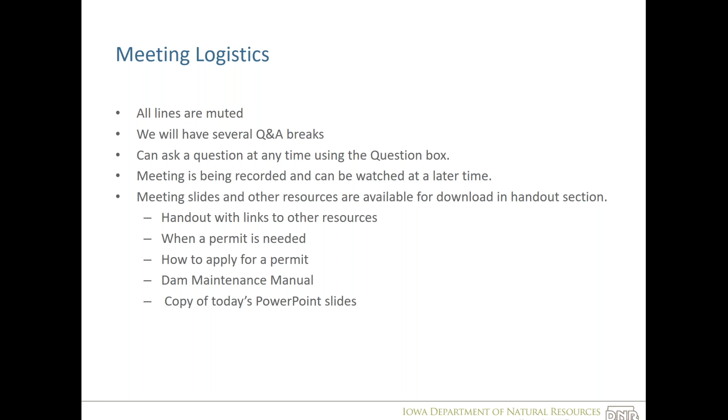This is our second in our 4 webinar series for the month of May. Today we'll be talking about how dams fail and proper dam maintenance. Last week was our 101, and that's recorded and available. Next week we'll be talking about finding and hiring engineers. Then our last week we'll be talking very technical, oriented on engineering design and what's needed for permitting, and potential changes to our dam safety rules coming up.

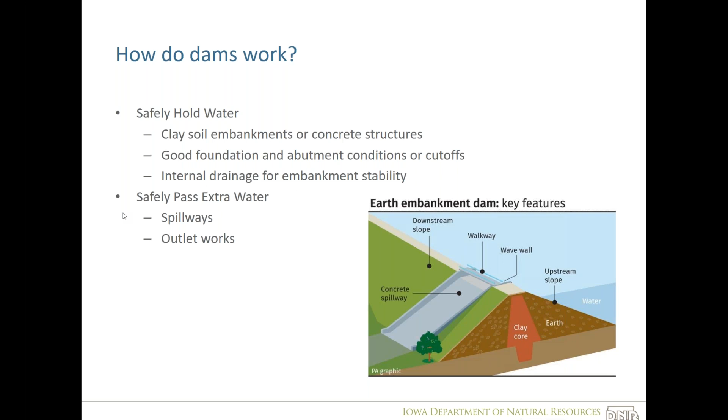So for a recap of our Dams 101, as we talked about last week, the two basic things that dams have to do are safely hold water and safely pass extra water without compromising, usually overtopping. We'll talk more about these, but obviously what causes failures is when one of these two things doesn't work well.

Last week we went over parts of a dam, which will come into play a little bit today when we talk about failure mechanisms. As you recall, we have our reservoir upstream of the dam, our principal spillway, inlet riser, upstream slope, crest of the dam is the top. The groin is kind of where the dam meets the abutment.

Outlet works is where our water comes out. A lot of our dams have internal drains and filters, and those drains will have outfalls, separate pipes usually that can drain those internal filters. And then most dams have an auxiliary or emergency spillway to carry extreme flows.

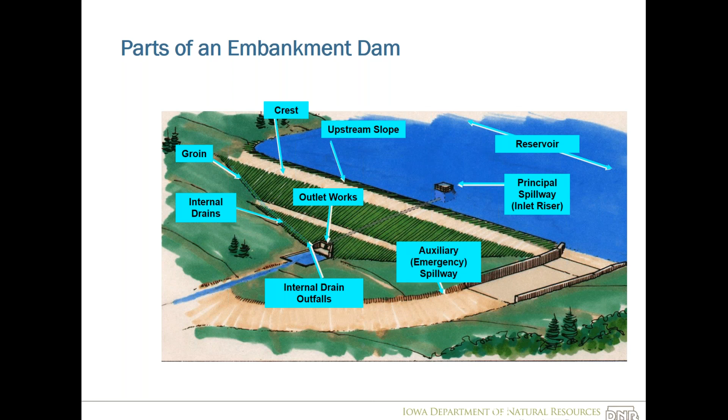Looking at the inside of a dam, this drawing shows a cross section. As we mentioned, embankment dams are typically made up of a clay core that's as water impenetrable as we can make it. And then if we don't have enough good clays, we zone dams using our best materials in the middle, and then upstream and downstream materials to help support that clay core.

Most of the time in Iowa, we do have enough clay available nearby that we build a homogeneous dam. We build one clay dam with a topsoil cover. And then, a lot of our larger or higher hazard dams, we include filters, which help intercept any kind of seepage through the dam and safely drain that out.

It's a tricky switch. So how do dams fail?

Probably one of the most common ways that we see dams failing is that they overtop. Earth embankment dams are really good at holding water, but if we get erosion down the back side of a dam, that steep back slope really lends itself to fast velocities if we get water flowing down it, and that can erode the materials, which takes the support away from the dam.

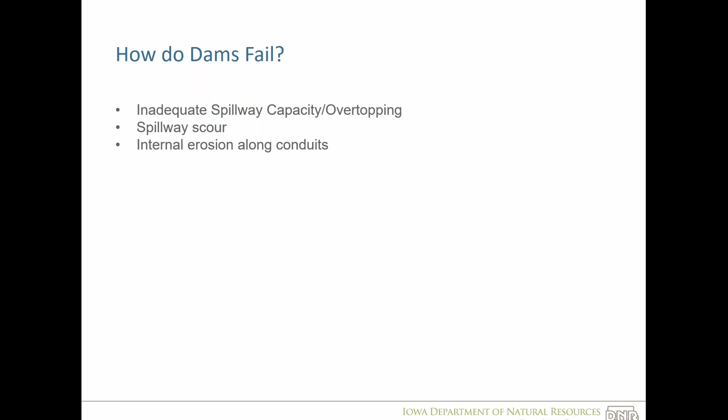Spillway scour can also be an issue. And then another very common way is internal erosion along conduits, piping from rodent burrows, or actual structural failure - if a pipe collapses or a chute or something, concrete or metal just gives way.

Contributing to some of those dam failure causes can be uprooting of trees or vegetation, long-term erosion doing damage to the dam itself. And same thing on the upstream side, if we have continued wave erosion that's eroding the upstream face.

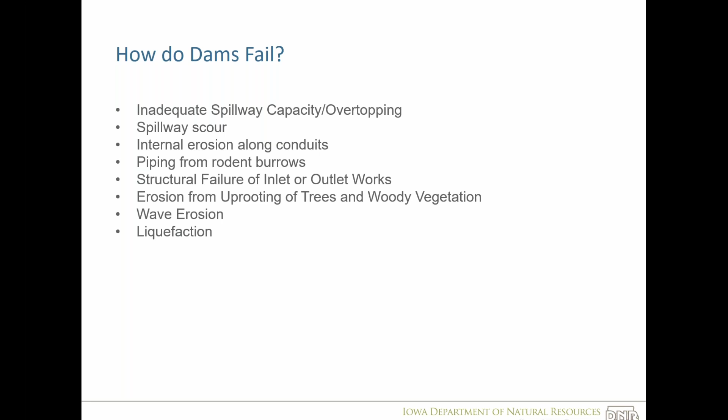This is really a rare risk factor in Iowa, but liquefaction is often caused by earthquakes, which basically, once the ground shakes, soils can become liquid and collapse.

So why do we care about dam failures? Obviously, dam failures can cause loss of life, downstream property damages, environmental impacts. You lose the reservoir itself, and of course, you have costs associated with replacing the dam and everything downstream that was damaged.

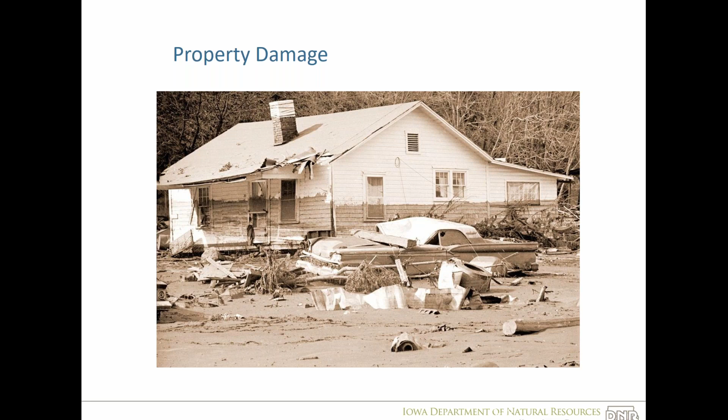A few photos of some historic failures. Obviously, floods in general cause significant impacts, and dam failures cause these extreme floods. And then, of course, even if you don't have downstream failures, you're losing your reservoir, which is the whole point of your dam.

One of the most common causes of failure of a dam is just overtopping. This can be caused by either a clogged spillway, meaning that we can't get the water out the way it's supposed to, or even if the spillways are operating at full capacity, it just might not be enough for that rainfall event. Our low hazard dams around the state, about 90% of our dams, were really only designed for about a 50-year flood. So when we get 100-year floods or some of our more extreme flood events around the state, those dams frequently will overtop, and that'll cause erosion of the backside, and sometimes they breach.

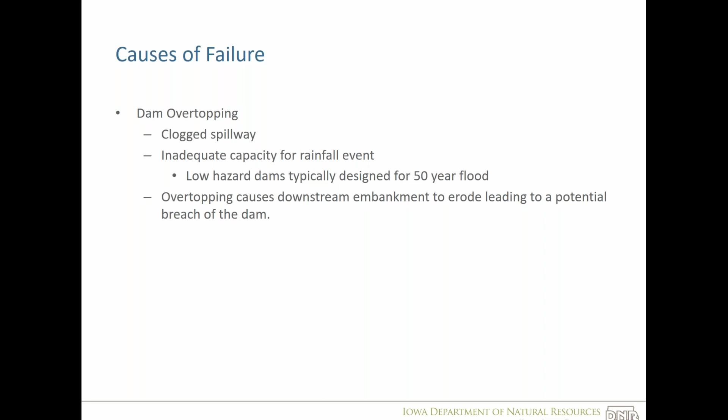As we talked about, that can erode the embankment away if we have enough flow. Just some pictures of that going on. Really, once you get head cut started, that's when things can rapidly progress through.

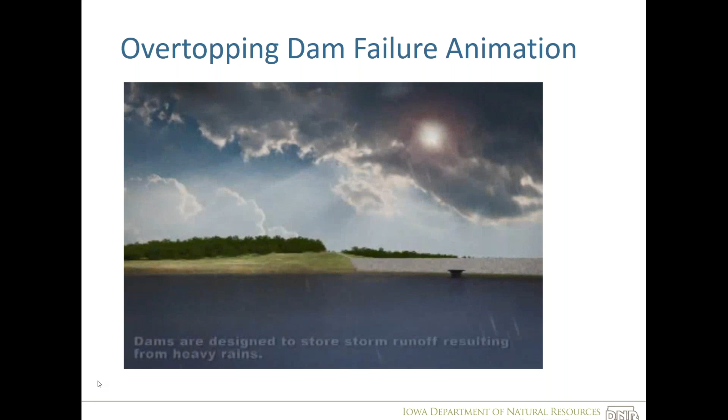This basically reiterates the obvious: when a dam receives a lot of rainfall upstream, that reservoir is going to fill up. Like we talked about last time, that's kind of by design - we do design dams to store that extra water, but sometimes we don't have enough storage or spillway capacity, even when we use our auxiliary spillway, which is happening here. So the dam keeps filling up, we get overtopping, and you can see in the middle there we got a major head cut started. Once you get that opening between the downstream and upstream reservoir, it progresses quite quickly.

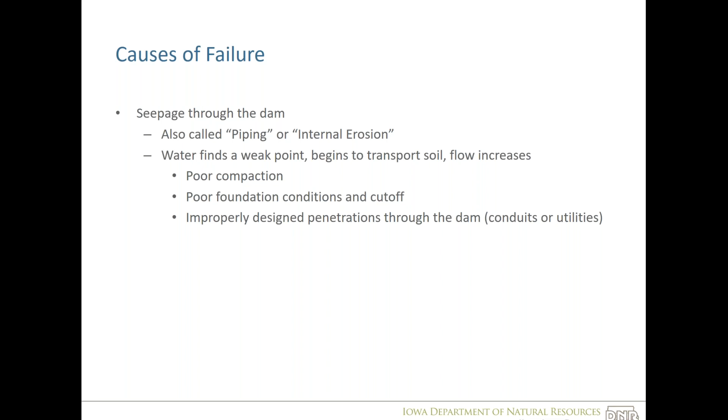I went ahead and put some graphics in here since I'm not sure how well the animations play through. This demonstrates what we've been talking about: seepage can find a path and start out as a very small trickle. A lot of dams do have seepage that is contained, but anytime you see seepage with any kind of materials, muddy water, or cloudy water coming out, that means material is being transported. As that material is transported, the pipe can get larger, transporting more material, leading to sinkholes upstream and, of course, large voids showing up.

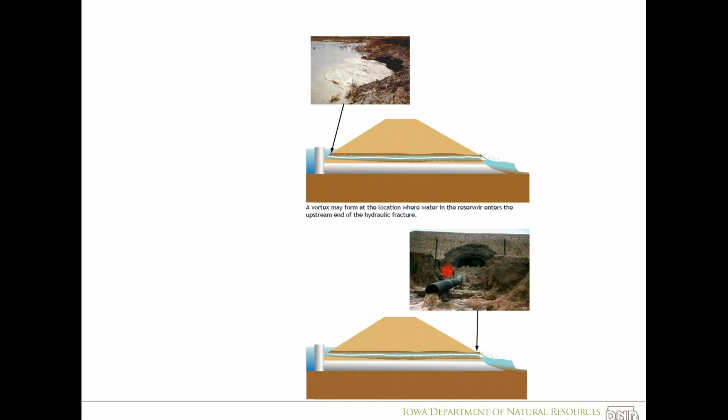This one obviously is after the fact, when it's mostly drained.

Similarly, that showed seepage above a pipe. One of our largest concerns, and something we pay special attention to in dam construction designs, is the treatment anytime we put round conduits in a dam - it can be difficult to compact under that pipe, which is a weak area by nature. We have different design methods to help deal with that, depending on the size of the dam and hazard class, but that can be a weak area where we get piping and internal erosion going.

So here's an example of that. This started with water coming out of a deteriorated pipe, but it shows that water flowing along a pipe can pretty quickly carry that soil away. We'll try to play this animation.

So for those dam owners on the call, seepage is pretty common, and that's one thing you don't want to take for granted. You always want to keep an eye on it, note any changes, and see if improvements can be made to better filter that, rather than just letting it be.

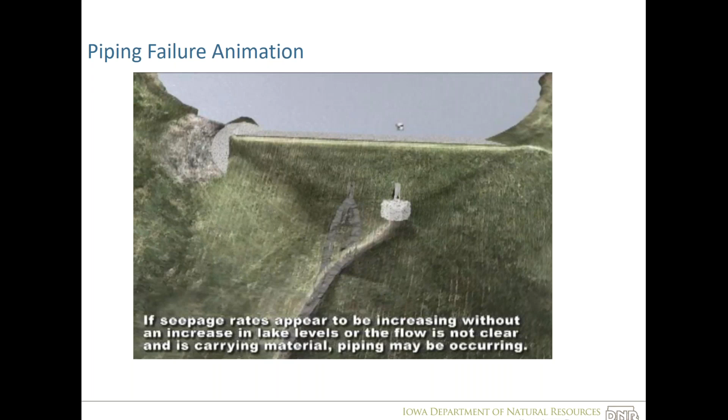So here it just shows the animation of that tunnel. Basically, the more water we get going, the more material erodes, and it has an exponential growth in how quickly that can grow and create a full tunnel through the dam, which could then cause a collapse and major loss of a large portion of the embankment.

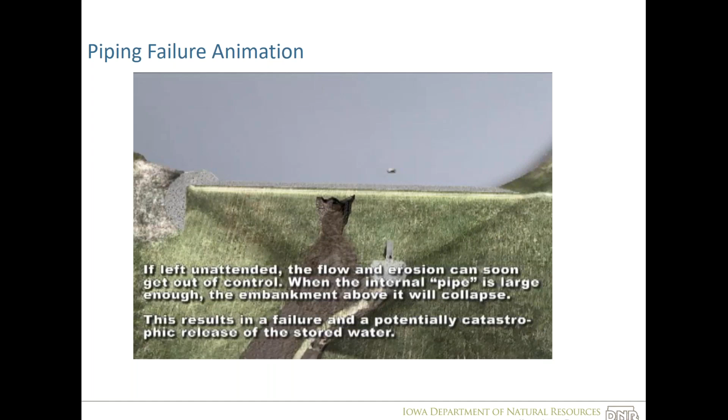So another cause is embankment slides. This is when the embankment itself becomes unstable, usually when the dam is saturated. As soils get more water in an embankment, the weaker it becomes, and that can happen from seepage into the embankment, or sometimes we get surface slides.

We get surface slides on the downstream slope just because we've had a ton of rainfall leading up to that event. So sometimes we can even just get rainfall infiltrating on the backside and causing some minor slides as well.

One of the things we try to point out is when large trees are allowed to continue to grow on dams, as they get older, they blow over. You can lose a significant amount of material when they do that, weakening the embankment.

A little sketch of a typical embankment slide here. Typically, you'll know it's a significant slide if you see this scarp up top. You'll usually see a vertical or near-vertical opening, and then usually a bump out below it that indicates you have a major slide.

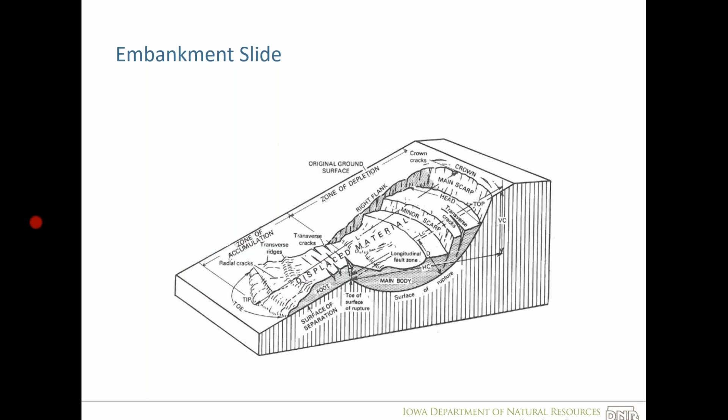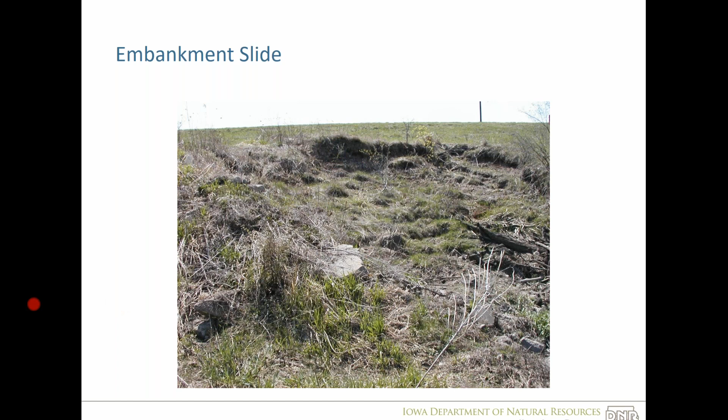Kind of the other main cause of failure of dams is structural failure. Spillways themselves can deteriorate. We can have pipes that rust through, concrete cracking and deterioration, and we can lose walls or floors. And then another common one is when we have concrete spillway chutes, we can get water starting to go underneath the chute.

That water going underneath the chute can erode the materials beneath that concrete chute, and that's particularly dangerous because we can't see it happening. A lot of times you can get significant voids underneath our concrete chutes before they're ever discovered.

And then of course, when we have concrete dams, any kind of instability of the concrete itself - cracking or mass movement - can occur.

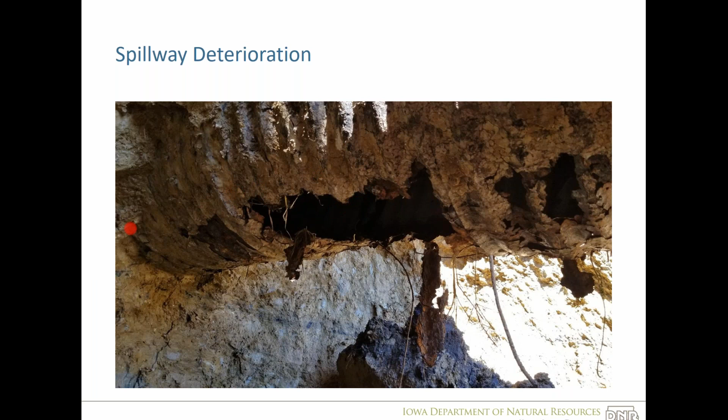Here's an example of that spillway pipe just hitting its max age and has rusted through. Corrugated metal pipes definitely have a limited age of 35 to 50 years and will need to be replaced.

All right, so about a half an hour in - this is kind of our first break. We're going to go on to some specific case studies of dam failures, but wasn't sure if there were any specific questions on some of the dam failure mechanisms.

I don't see that we've gotten any questions. Okay, so if you think of something, go ahead and type that in at any time, and even if it's on what we've talked about before, go ahead and type that in and we'll talk about it in a future break.

So our first case study I want to talk about is Lake Delhi. I'm sure a lot of you have heard of this lake up in northeast Iowa. This one is especially relevant - I started at the DNR in the dam safety program about six months before this one failed, so it was certainly a learning experience for my part and Casey's part as well. I think Casey hadn't quite started yet when it failed, but he did shortly after, so we've watched this one closely.

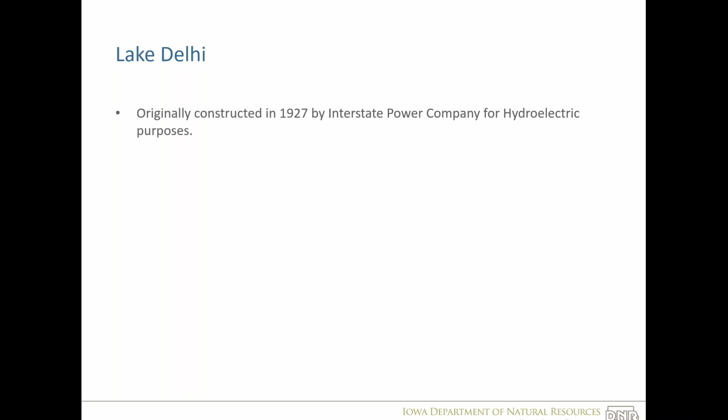It's an older dam, built in 1927. It was a hydroelectric dam. It held 3,790 acre-feet of water, and if it filled to the top, we had about almost 10,000 acre-feet. It was 58 feet high from the downstream toe.

It created a very large and long impoundment, basically damming up the Maquoketa River. So we had a 9-mile long impoundment upstream of the dam. It wasn't very wide per se, but a lot of homes and development had happened over the years that used that impoundment.

In 1973, they no longer maintained the hydroelectric generation—it wasn't profitable anymore. And it was turned over to the Lake Delhi Recreation Association, made up of the homes that surrounded the lake.

It did have inspections every 5 years, both by the DNR, and they were required to hire a professional engineering company to do an independent full investigation as well.

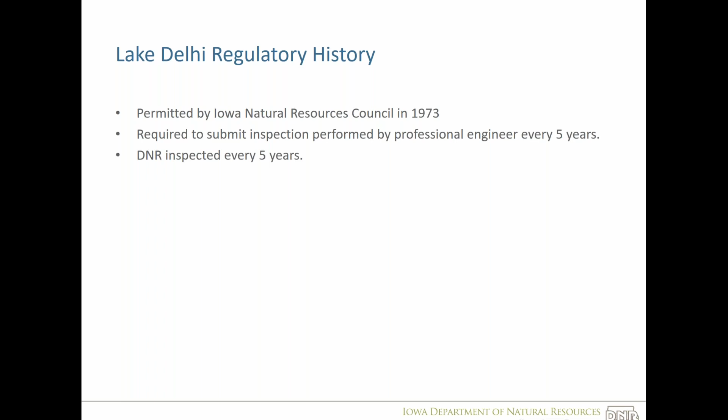Our last inspection report on it had noted some things. There was some upstream erosion. The gates were all in pretty bad deterioration—one of them was especially bad—but they were at the time working on repairs. They did have new gates ready to put in, and they were getting ready to do a lot of work on the dam.

But they did have a lot of trees and brush that we'll look at in a minute here too, on the downstream side. So here you can look at a picture of the gates, the old powerhouse where the hydro was, and this earthen embankment that had a huge amount of trees and brush.

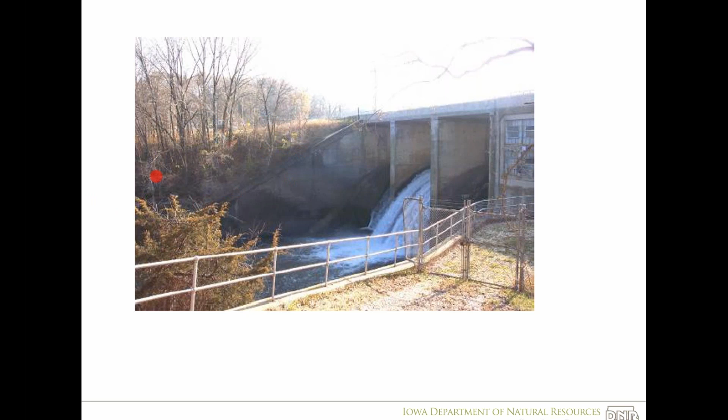Another picture—there was a road over the dam originally. Once again, you can see it's really pretty heavily wooded, so it's hard to inspect and see if there's anything going on, which we'll talk about in a bit.

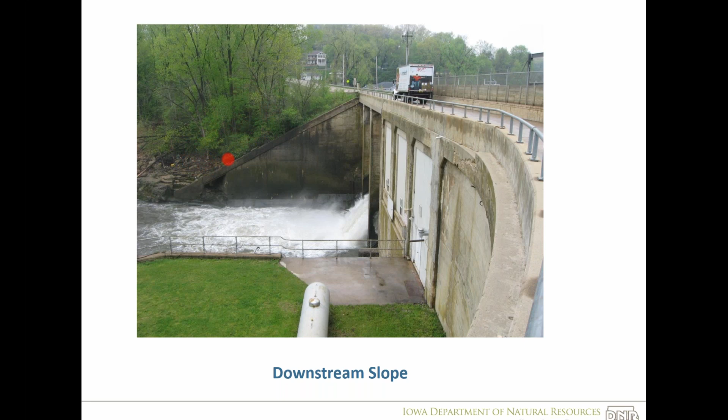Like we said, they had some issues with the concrete and the gates. This is leakage around the gate, more leakage. This is after the failure, but you can see some of the historic damage to the concrete here. Like I said, they were planning to do repairs, but hadn't gotten to it yet.

So in 2010, we had really record rainfalls upstream of the dam. Starting Thursday night the 23rd, they could pass low flows through the old hydro gates, but as they got larger rainfall events, they would slowly open up these 3 gates. So that's what they were doing.

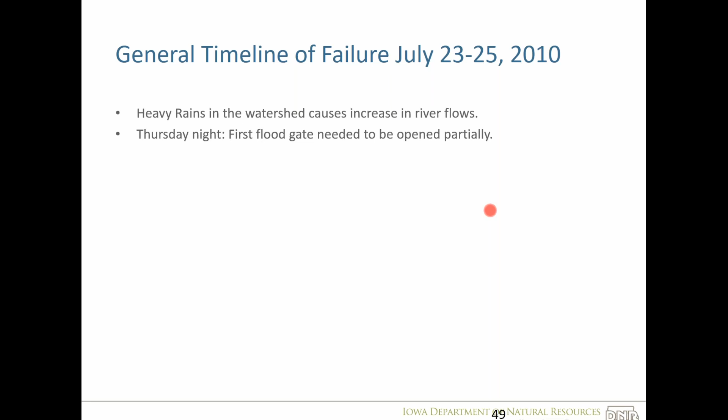So they opened them all up, but one of them kind of sticks, and so one could only be opened up to about 6 feet compared to, I think, 15 or 16 feet they should have been able to open up.

So they were already kind of in flood fighting mode when they got a weather service forecast that said, hey, we're going to get between 11 and 14 inches over the next 2 days. So they knew some tough times were coming.

They were keeping a close eye on the dam. At 3 a.m. Saturday, they noticed a whirlpool and some roadway settlement on the south end of the dam, which is that earth embankment.

At 5:30, as the sun started coming up, they noticed a significant sinkhole on the upstream slope, which is indicative, as we talked about before, of some kind of piping going on inside the dam if we're seeing a sinkhole that large.

And then, as it got more light, they could see that there was water coming out downstream of that embankment.

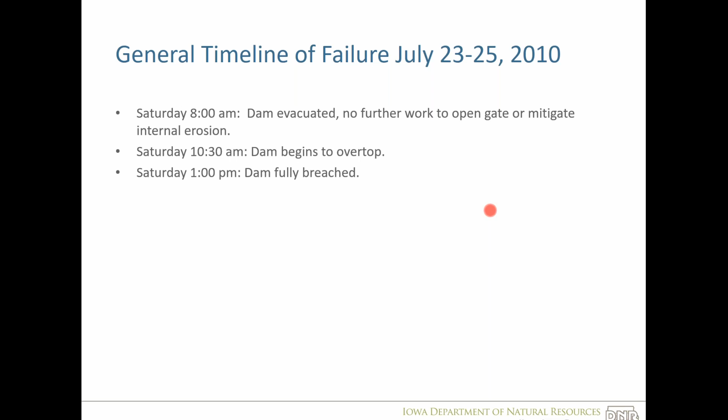Because of those significant observations, they basically got everybody off the dam. It wasn't safe to try to mitigate anything at that point. Water level during this time continued to rise as they kept getting that peak flow coming in. At 10:30 a.m. the dam actually started to overtop, and by Saturday afternoon the dam was fully breached and emptying.

This is a kind of cross section of the river. We're to the left here at the downstream, and we're looking at the river profile as we go upstream, up to Manchester. The lines at the top are the different flood levels that occurred on the Maquoketa River.

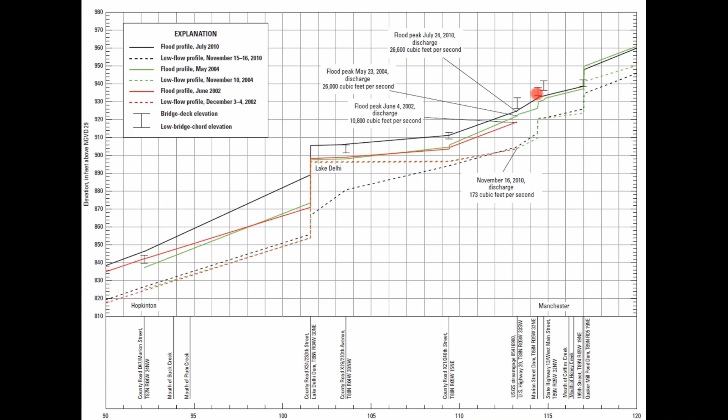In 2010, this black line at the top was the new profile that was measured. A little zoom in on this was the traditional lake. Really, the lake in previous past floods hadn't seen a significant rise. It didn't - the spillway was able to keep up, really didn't have a significant flood or increased flood depth on the dam for those previous flood events.

Pretty minor, versus 2010 when we had significant additional height on the dam. So, kind of a new test situation. Obviously that caused flooding even without the dam impacts.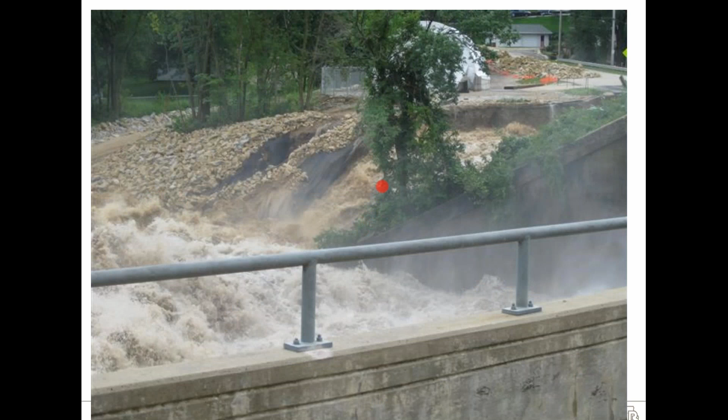This is looking downstream where previously we saw all those trees and brush. There's what looks like a boat going over - I think that might have been the barge they were using to work on the dam, starting to go over.

Yeah, it's that work barge. And then the road, the dam's embankment is completely gone. This was what was left - the guardrail held up quite well though.

Some of the after pictures - what's kind of amazing is just some of these boats that got pulled through the gates or even trapped on the gate piers here and twisted.

One thing to note that we'll talk about in a minute is the earthen part of the dam did have this rock or concrete wall to help stabilize the dam. We can see parts of that concrete wall that was supposed to hold the water here that eventually broke away - here you can see the other part of it. And it had a sheet pile cutoff along the foundation.

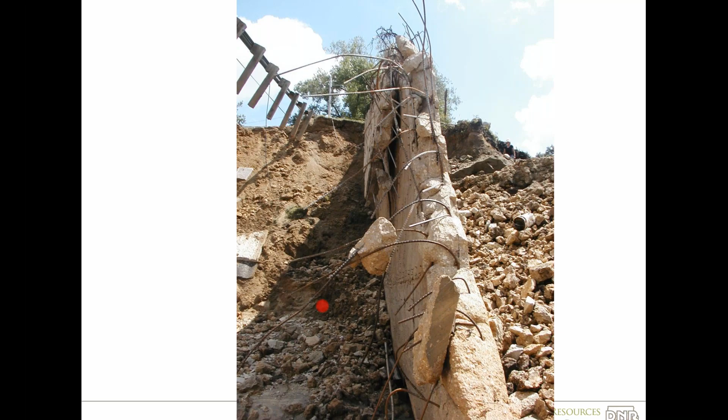A close-up of that reinforced concrete wall. And then left with an empty impoundment.

One thing interesting about Lake Delhi Dam is nationally it got a lot of interest, and there was a push that said, hey, when dams fail, we really need to do a better job of investigating them, to put together reports so we can learn from them and see what happens. So that happened in Iowa in 2010 for Lake Delhi. We were able to put together a dam failure investigation.

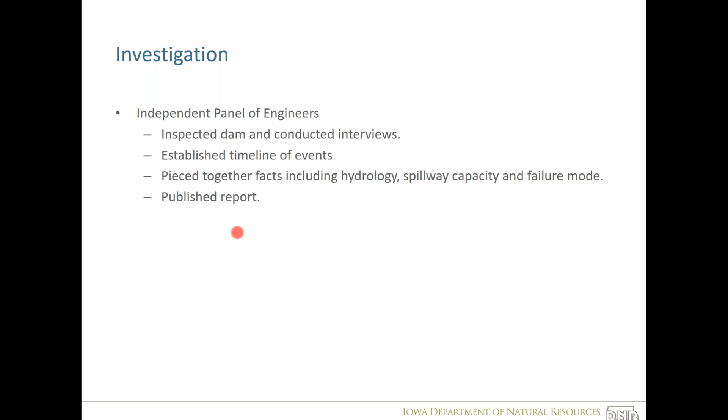FEMA helped out. The National Dam Safety Program, National Dam Safety Review Board, helped put together a team of 3 federal dam experts - one from the Bureau of Reclamation, one from the Federal Energy Regulatory Commission, and one from the Army Corps of Engineers. They came and inspected the dam and interviewed everybody that had anything to do with the dam over its history, and they put together a report.

That was really useful to have a true forensic study of exactly what happened and what led to the dam failure, and some other what-ifs that had happened - what if they had opened the gates, or different scenarios. A lot of people start putting opinions out when things like this happen, so it was nice to have a report that was able to look at all those theories in detail.

But really, the key player in this was this concrete wall in the earth embankment. You can see here on the upstream end of the embankment. One of the couple flaws with it was that it was 6 feet below the top of dam.

So when we had that new record level in the impoundment, we basically had a water level that was above that concrete wall. We also likely didn't have very good compaction up against the wall behind it. So once we got water above the wall, seepage was likely rapidly occurring.

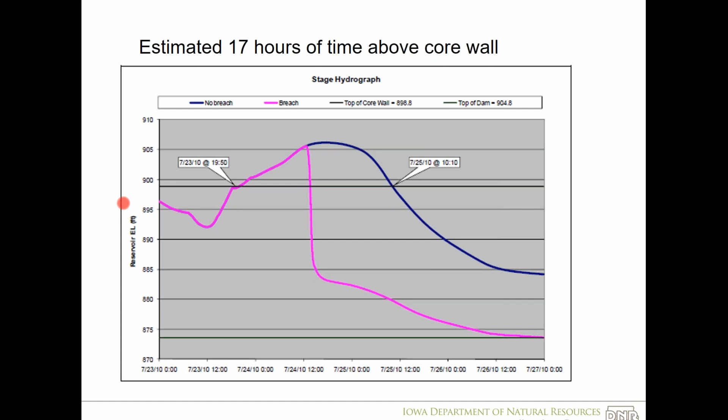This is some of the forensics they did, and it was determined that even if the dam hadn't failed, there would have been a significant amount of time of flow over the top of the wall - about 17 hours. We can see that once the water level got high, we started seeing whirlpools and exit discharge. Water was pretty much flowing right through the dam even before it overtopped.

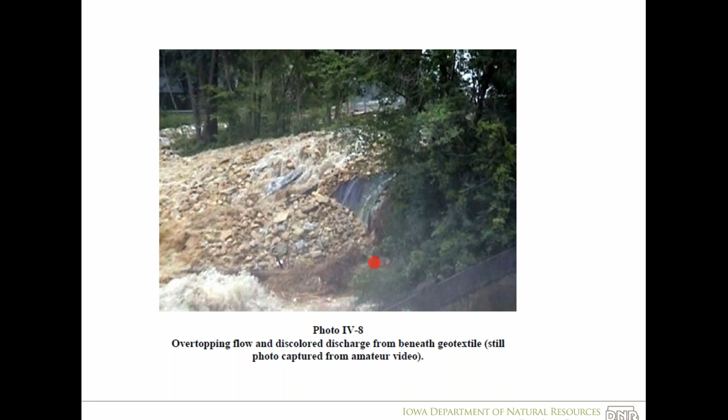Some of these pictures show that real cloudy discharge even before we had overtopping - here and here.

So, like I hinted at, the cause was basically that internal erosion, or what we called piping. Once the water level got above that wall, there really wasn't anything to prevent it. It was real sandy soils, and that's why they put the wall there, but since it didn't go to the top of the dam, it was kind of an inherent weakness that was finally exploited when we had that record flood.

This was kind of the first national forum dam failure investigation. It really spearheaded some committees on the national level, developing guidelines on how best to do these.

Some takeaways for owners: anytime your dam is seeing new record levels, be very alert - you're now fully testing your dam where maybe it hasn't been before. The trees and brush on the dam - they might have seen some problems a little earlier had they been able to see down the back slope of the dam.

And then a big takeaway is, we inspect the dams every 5 years, but was there ever, since it was built in 1927, a fully thorough engineering report completed that looked at it from a fresh perspective and said, if we design this dam today, what would we do different? Are there weaknesses between what we would do now and what was done in 1927? So we need design reviews occasionally on these larger dams.

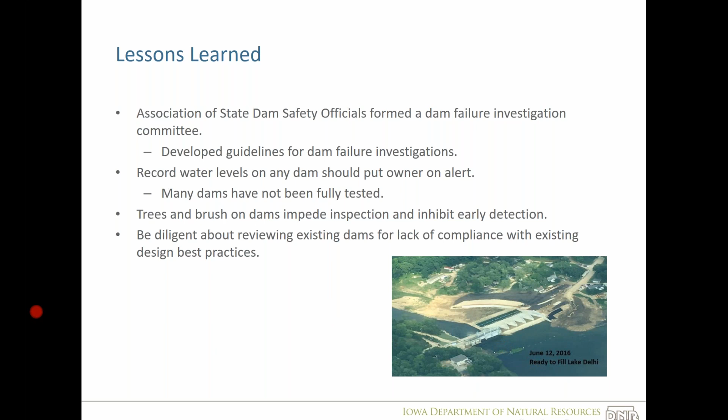Good question, I haven't dove into Delhi in a few years. One thing that did contribute obviously was the third gate didn't open fully, so they were able to pass less flow than in the past. And then, like we talked about last week with the bathtub, if we hit that capacity, the reservoir will continue to rise, so it might have been a little bit higher. I think there was also, as I recall, this flood tended to have a lot more volume of flow versus - even though the peak flow rate was similar to maybe '04 or '02 - we just had a lot more volume coming in too. So we had a higher flow of water for a longer period of time. The lake really wasn't able to store as much peak flow as it could have for the previous floods. That's kind of what I recall.

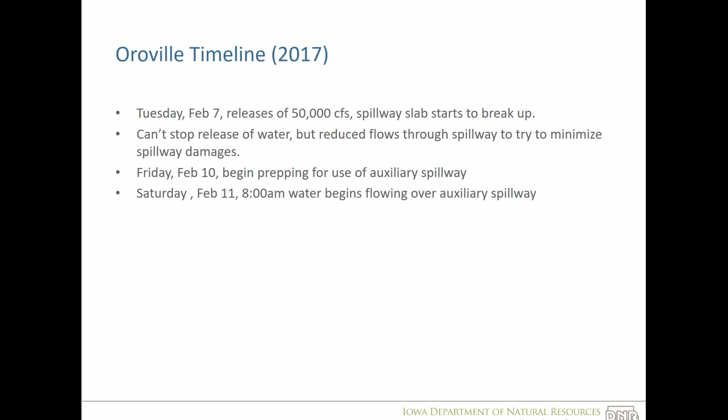So by February 10th, because the lake kept rising, they were going to use the auxiliary spillway for the first time ever, which occurred on Saturday. Then on Sunday, they actually had to order evacuations, which we'll talk about. And it turned out flowing water over the auxiliary spillway was worse than using the service spillway - that was causing worse damage potentially than upping the flow through that damaged principal spillway.

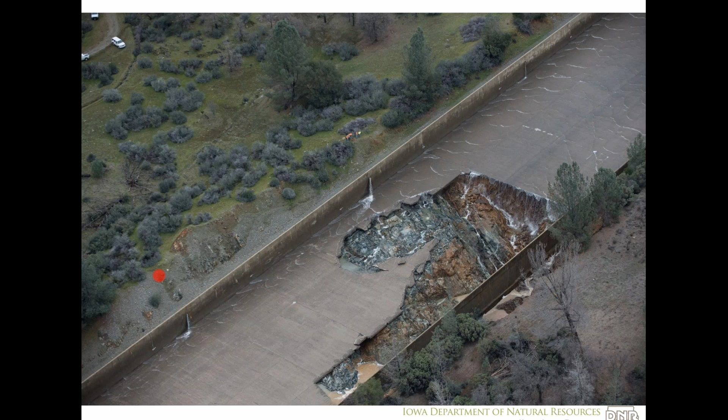So here's some pictures of the initial damage that occurred when that started breaking up. This was really the area of damage, and this is about a 200-foot wide spillway. This was after they noticed it, and they stopped the water temporarily just to be able to quickly see what's going on there.

And we talked about this - the reason they were doing evacuations is because as water started to flow over the auxiliary spillway, they were getting erosion of that downstream abutment, and they were getting some head cuts that were going close to that wall. They were worried if that undercuts the wall, and that entire 30-foot high wall with a huge lake behind it collapses, that's going to be a very massive flood wave downstream.

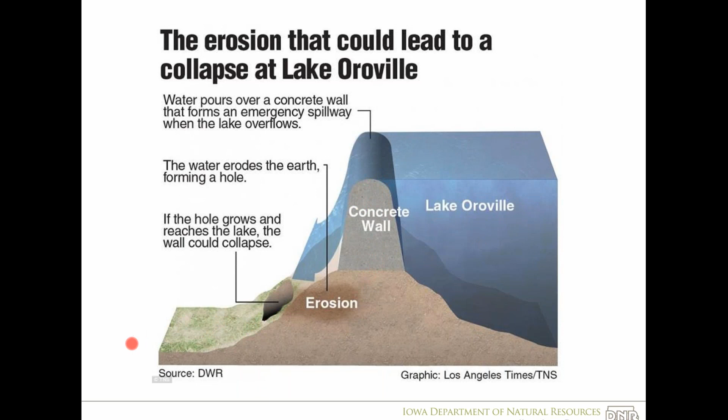Since they were getting the erosion, they basically had to increase the flows over the service spillway, even though it was damaged. So here you can just see that 100,000 CFS. For those who know Coralville or Saylorville, their peak flows are around 20,000 when they fully open their spillway gates. So we have about 5 times what comes out of Saylorville when it's fully open.

And of course, that just caused additional damage to that eroded area. They were just really crossing their fingers that it didn't continue to climb up toward the gates. Here you can see the water leaving - it had this flatter area, and then it really got about, I think, 25% slope or something on the downstream. So it really cruised down that backside.

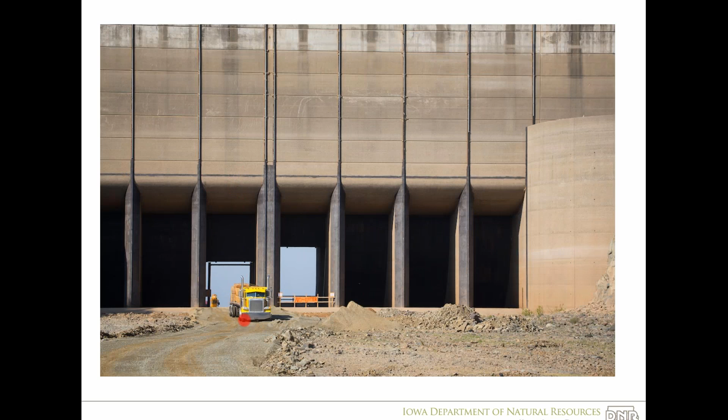To give you perspective, this is the height of those gates - it's a truck, so this is a very large spillway. And the auxiliary spillway really wasn't carrying a lot of water - about 2 foot depth, I believe, at max. And even 2 foot of depth over such a long length was converging and causing significant channel erosion downstream.

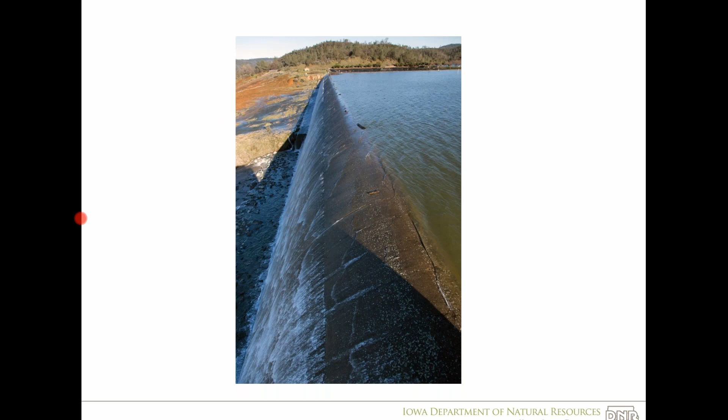Here you can kind of see it flowed over kind of uniformly, but then would find very channelized areas, and so it would start to cut and erode up toward the dam. No one was 100% sure, and you only had hours to make decisions. Would it have held? Probably, but are you going to tell people downstream that we're probably sure this wall will hold as we get erosion up toward it? So the emergency management officials were like, well, we have to evacuate if we're not 100% sure that this thing is going to hold.

Some more of that downstream erosion from the auxiliary spillway - you can see it just kind of funneled down. A lot of the historic reports considered this whole abutment area to be rock. It's a very rocky area, but a lot of the design assumptions that went into both the service spillway and the auxiliary spillway was that it's all built on rock, it's all rock downstream - if we get these large flows, it's just flowing over rock, it'll be stable. But really it wasn't solid rock - it was very rocky soils at various depths to true solid rock. So it actually was a lot more highly erodible than they assumed in some of the early designs and construction.

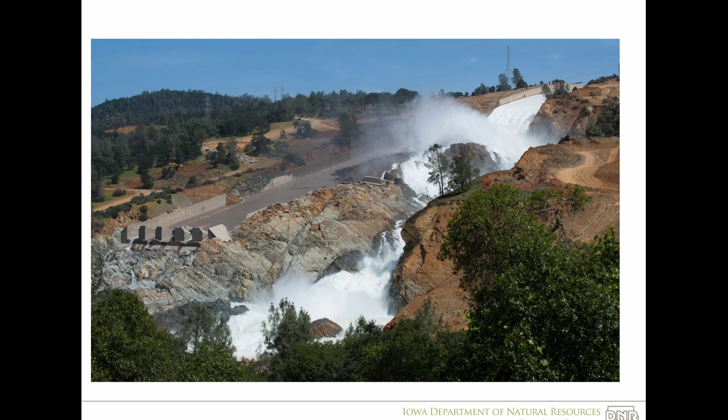So then you can see some of the scale of the damage and scale of the spillway here.

Like I said, really this kicked off setting the standard for dam failure investigations and making sure these are done. Obviously this is on a much larger scale, but a team was stood up and looked at how one of the largest dams in the country could have this happen with such a routine flow, and how we missed it. How do we miss what would cause this? Through all the inspections, all the reports, all the oversight of this dam, if it can happen to this dam, then how do we know any dam is safe?

So what they found was - and I won't get into too much technical detail for this webinar - basically water was getting underneath the slab. With that much flow and velocity, it doesn't take much. If you get a little bit of that slab lifting up, the water comes down that chute so fast that it can pull a section of that slab up. Once that occurred, it could quickly erode that underlying weathered rock that, like I said, when they built it, the people on site just kind of built it as though they were building on solid rock, and it really wasn't. It was really weathered bedrock and a lot more erodible than they had assumed.

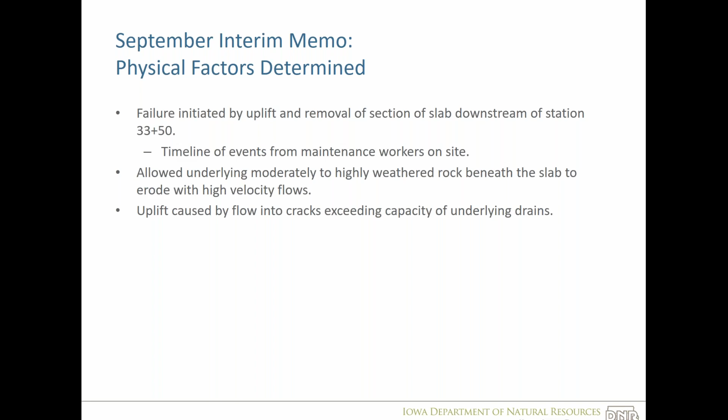We'll talk about one of the most contributing factors. Really one of the biggest contributing factors of how that happened was that there was a disconnect back in the 60s and 70s between the designers, the engineering design of dams, and then it got handed off to the field. So you had an owner's engineer representative out in the field, and you had the contractor, and they would take the plans, and if they noticed anything different in the field or had issues or questions, they would make the decisions out in the field, and they wouldn't always talk back to the original designers.

So there were some significant changes in the design of the chute that reduced the thickness in some areas from what was supposed to be 15 inches thick to only 7 inches, and I'll show you those.

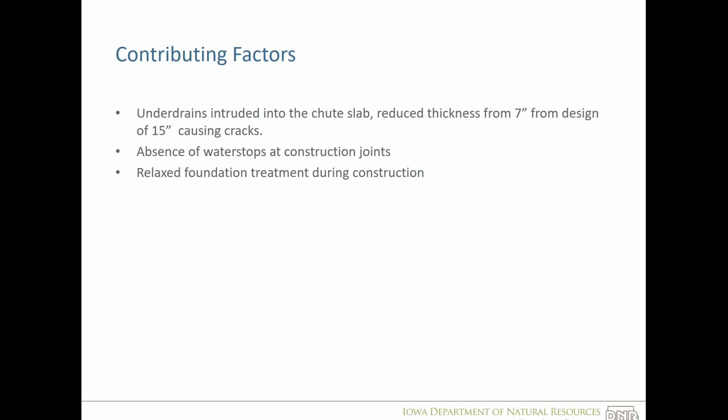And then in the design they had said, hey, anywhere you have loose fill or you don't have solid rock, you should over-excavate that and fill it with concrete. Well, that would have added a lot of cost because there was a lot more weathered rock and soil-like materials than they had accounted for. So now you're looking at delays and cost overruns. It was easier to say, oh, that foundation will be fine.

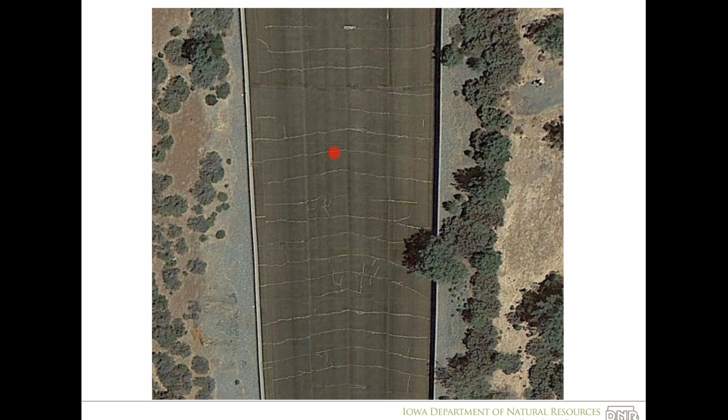However, because of the way these drains were built, it basically cracked above each drain. Here we'll see this is the slab. It was designed at 15 inches thick. However, they didn't really want to put the drains into the solid rock where they had it under the slab. It was a lot easier to lay the drain on the surface and then just pour the concrete over it - someone thinking, hey, 7 inches of concrete, reinforced concrete, that's still really thick, we don't need the full thickness everywhere. So, kind of another field change decision.

So that created a crack there, which could never be fully sealed. If you notice in some of those pictures, we always had high flows through the drains anytime the spillway flowed. So we had a lot of water going through these drain pipes that really it wasn't designed to carry that much water.

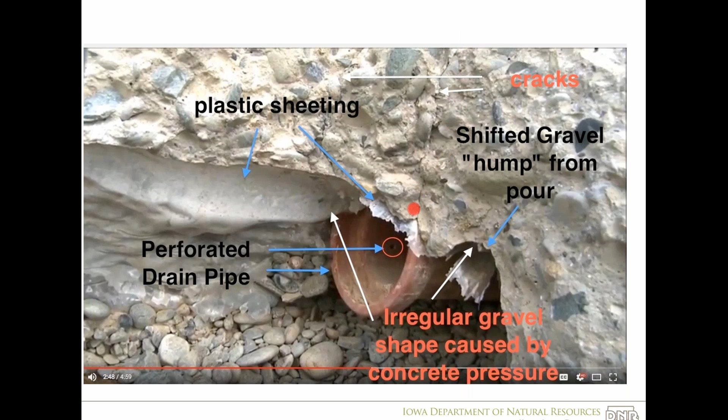So that was kind of... I don't know if I have a slide on lessons learned or not. No. So yeah, lessons learned really were: we can't ever assume that a dam that's been there for 30, 40 years and everything's working fine, everything will be fine. There can be inherent design flaws that we haven't discovered yet.

And the key thing was all the water that those drains carried. From day one, people said, man, that's a lot of water, but it's like, well, what are you going to do about it now? So they were never really fixed. The cost was just too much to think about. And so even on one of the most highly inspected dams, it just said, well, they've always done that. It was kind of that lesson learned: we shouldn't always just say, well, it's always done that.

It'll be fine. But since that is such a critical part of the water system in California, it had to be rapidly fixed for the next season. Basically the way the water cycle works in Northern California is you'd have drier parts of the year and then you'd have these wet seasons when we had the large runoff in the winter. And so they had a very short season to basically fix it or temporarily fix it.

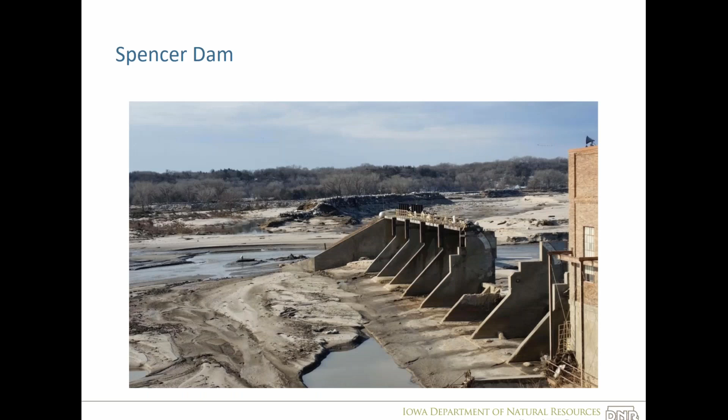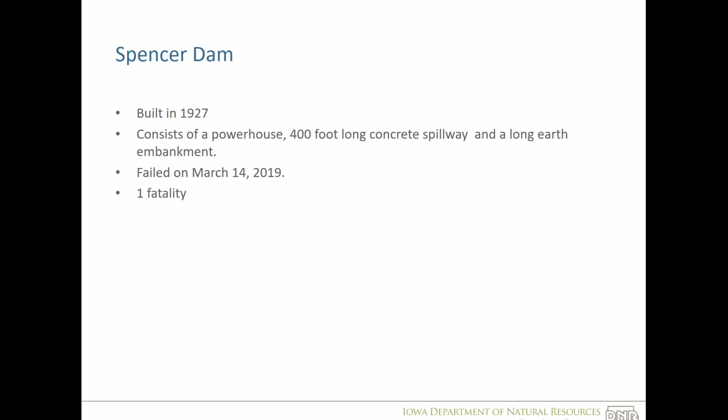As you recall, the winter leading up to spring of 2019 was very cold. So we had very frozen ground, high frost depth, which also led to very thick river ice and snowpack. And then in March of 2019, we had what they call the bomb cyclone at the time, a winter storm occurring in March that, because we had warm temperatures, produced heavy rain at that time. And of course, the heavy rain had really nowhere to go except flowing off the watershed. And then also made all that huge thick ice break up on the river and flow rapidly downstream.

So everywhere that ice hit, it would cause ice jams along the river. They suspect there was a large ice jam that occurred just upstream of the dam on a bridge, and then that broke through as the bridge gave way, which really just sent a huge amount of ice and floodwaters toward the Spencer Dam. And then there was a single home and occupant downstream of the dam that was basically swept completely away.

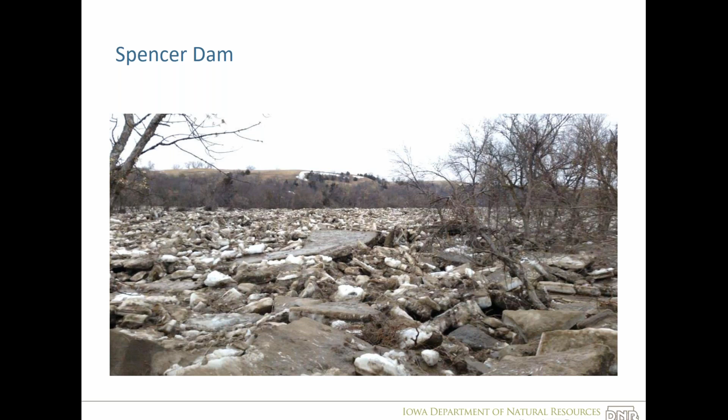Here's some pictures of that upstream ice. And here's a picture of just one of the pieces. Pretty amazing. So this was the morning after, I believe. There wasn't a lot of pictures or video at the dam. It was in the middle of the night when most of the flows, I think, came down. Very kind of an isolated dam as well. But you can just see that huge amount of water, and it just busted that dam up.

Another recent report came out just in April, and that's available. It was fairly straightforward findings. They did some what-ifs as well, but with that much ice coming down to those spillway gates, they got jammed pretty quickly, which led to water completely going over the top of this dam and washing out portions of it, and of course the gates, and the pressures on the concrete were too much for the design.

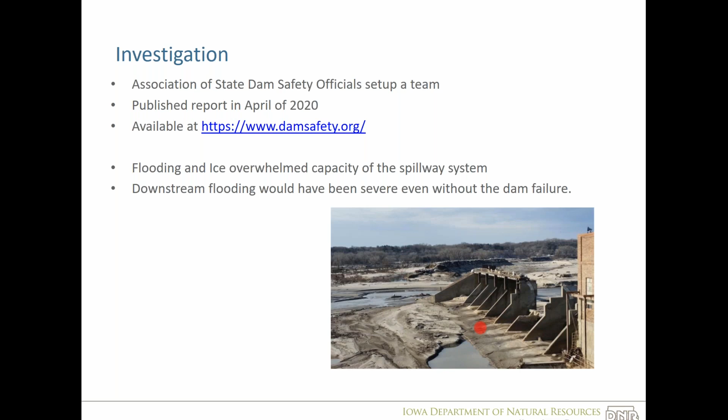Since it was such an extreme flood event, a lot of the damages would have occurred even without the dam failure, if the dam hadn't been there.

So those are pretty significant incidents, failures. We've got just a couple more minor ones that didn't lead to full failures, but I wanted to point out that these are kind of always happening and something we have to keep an eye on and be ready for.

We have the Bedford Reservoir, the Bedford Dam down in Bedford, Iowa, southwest Iowa. Previously it was their water supply reservoir. They'd switched to, I believe, rural water in the past several years, so it was no longer used as their water supply. Now it's more of just an amenity, a little park area.

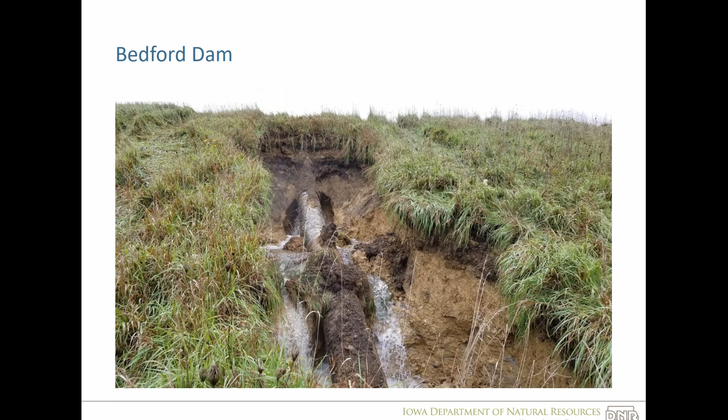But then in October 2018, we had a call basically pointing out that they've got a little problem here with the spillway, and you saw this picture earlier. So you can see the water flowing out.

Obviously our first priority seeing this situation was, how do we get the water down? How do we get this flow stopped through this breach area? Luckily they had an old water supply line that led to the plant that we could at least get some water flowing through, get that opened up so we could slowly drain the lake to prevent further erosion of this embankment.

That pipe you could see in a previous picture, I showed a picture of it earlier too, just completely rusted through. So we had water basically flowing below the pipe, down through the bottom portion of the dam. And then it just slowly eroded all that material when we got a high rain event.

But really there was no piping noted, no signs of any kind of water flowing along the pipe through the main part of the dam here.

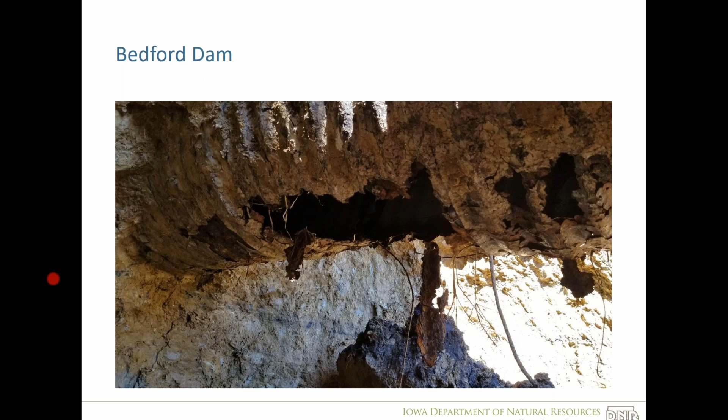And this, I think I showed earlier, but just that extreme - if I recall, this pipe was about 50 years old, so it just finally rusted through. That has since been fully replaced, just completed that last fall, I believe, this spring.

The homeowners and things upstream - this is kind of a native grass mix, so it's not something that's normally mowed. So it was actually observed by those people downstream and not the owners originally.

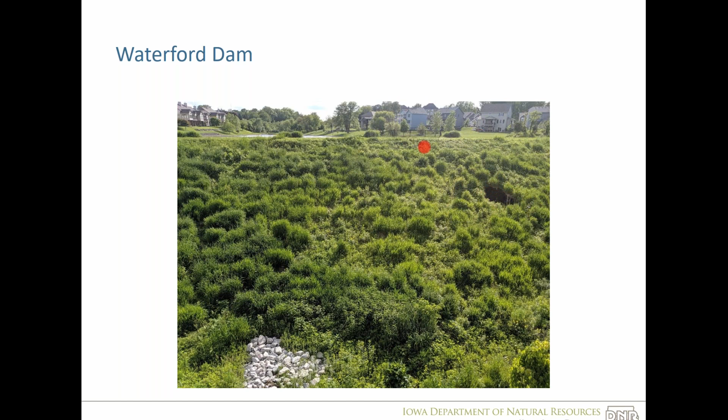Closer look, and then when you walk up to it, we had a huge - this is probably a 12 to 15 foot deep hole - sinkhole over the dam, right over the conduit here.

So they do have a limited lifespan, probably 35 to 50 years. This one had basically hit its life, and you can kind of see it just caved in at some point. Once we had a large hole in the top of our pipe, the soil was able to just slowly wash right into it.

Luckily this was a very isolated incident with that spillway pipe. But had we had further high flows or a flood event that occurred after that happened, we could have had some major issues. But it was fairly isolated, so that was able to be detected, and then full pipe replacement was just completed last December.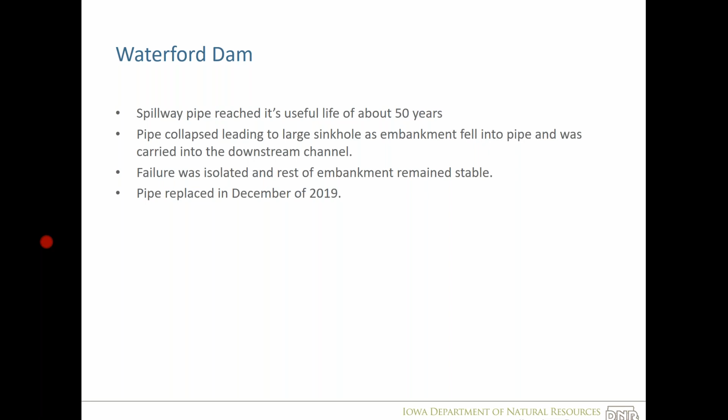So that's kind of a conclusion of generally how dams fail, and then just a few different examples there, big and small, of incidents.

Next, we'll start talking about operation and maintenance of your dam. So we'll take a little break here if there's any questions.

We don't have any questions yet that have come in on the case studies. There was one that came in right at the beginning when you were still talking about failures. The question is, how many dam failures occur each year?

I don't know the answer to that. I don't even know the answer to that to say in Iowa. As we talked in our last webinar, we have about 4,100 dams, the bulk of those low hazard. Occasionally we're out and we'll see a farm pond that had breached for some reason. Those don't always get reported to us. On our major dams,

we inspect those frequently, so we know when there's events. And really we had been fairly quiet until these last couple of years, which was kind of interesting, when Bedford and Waterford opened up. Those were really kind of recent examples, but we hadn't seen a lot of problems before that. But like I said, we don't always hear about them either.

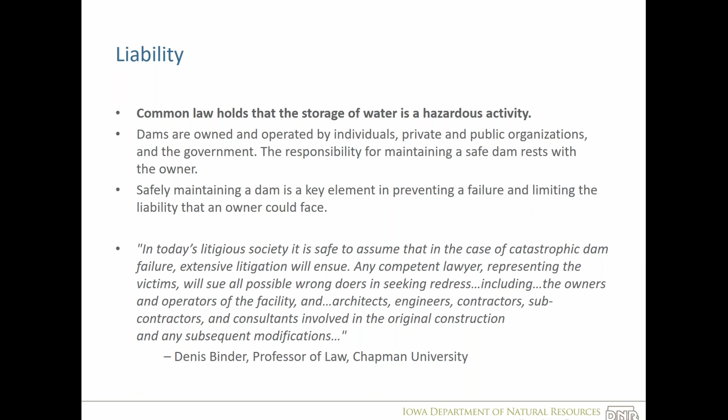However, as we all know, anybody can sue anybody, and everybody will get sued basically if a dam fails. So when a dam failure occurs and there's downstream damages, likely they will sue the owner, they'll sue the operator, they'll sue the engineer, they'll sue any kind of contractors that worked on the dam. Anybody, of course, is fair game. So best practice is to maintain it best you can, to show that you were doing everything you could, but always be prepared that lawsuits can occur if that dam does fail.

Not on the legal side, but you can kind of think of a dam as an older car. The better you maintain it, the less costly repairs hopefully you'll need in the future. You know, you let something go downhill, then its repairs tend to get more expensive than if you're maintaining it along the way.

So we'll first talk about the operation side of operation maintenance. Probably should have made these as pop-in bullets, but we'll throw just a bunch of text at you, I guess.

First of all, some of our dams have formal operation maintenance manuals. Some of our larger dams, some of our dams that have gates that have to operate in flood events, those sorts of things. So obviously keep that handy, keep that reviewed, keep that up to date, and then follow the recommendations that are in that manual.

The next step is really just keep good records of your dam. If you don't have the original design plans, reach out to us. A lot of times we do if it's a permitted dam. But keep those handy, because if anything happens to the dam, it's handy to have the original plans and calcs for the engineer working on repairs.

Keep your inspection reports. Keep documentation of any repairs you've made over the years. And then keep records of seepage and cracks. So if you notice wet areas, see if there's ways to measure that, or the extent of that, and try to track that over time.

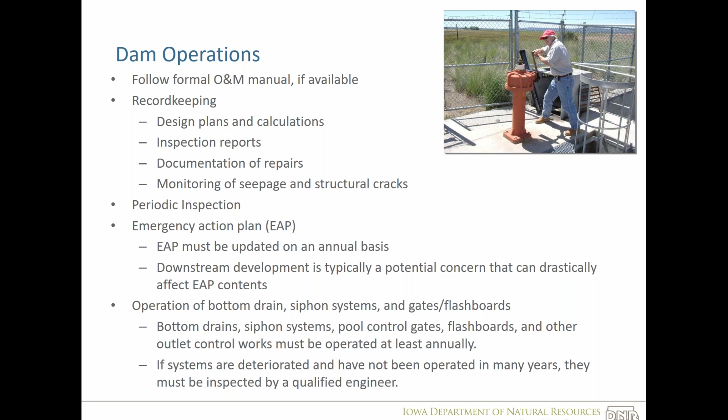Anytime you have anything that's sort of movable on the dam, it's good to move those items at least annually. So if you have a drain gate that can be open and closed, try to crank that a little bit every year. You don't have to fully open it, but just get everything moving, make sure it works. And obviously anything with moving parts requires maintenance, so make sure that's properly greased, and if it needs repairs, get those repairs scheduled and budgeted so they can be fixed.

Other things with watching the dam are just watch your pool elevation, see if you have any changes. Keep floating debris away from the dam. If you have instrumentation systems, hopefully that's in an O&M plan, and you know what those are there for, and know what to watch and how to measure those. And then if you have any kind of alarm or warning systems, make sure those are being monitored.

So inspections, and I tried to put some general guidelines on here, but really it does depend kind of dam to dam.

If you have a low hazard dam, it's good to at least have a casual look at your dam at least weekly, just to say, yep, everything looks okay. If you never look at it, you're not going to detect if there's new issues arising.

Our high hazard dams with a permanent pool behind them, there should be some general eyes on those almost daily, just to make sure nothing unusual is happening. And then you'd probably want at least a weekly full walkthrough along the embankment or along the toe of that high hazard dam, just to make sure nothing unusual is occurring.

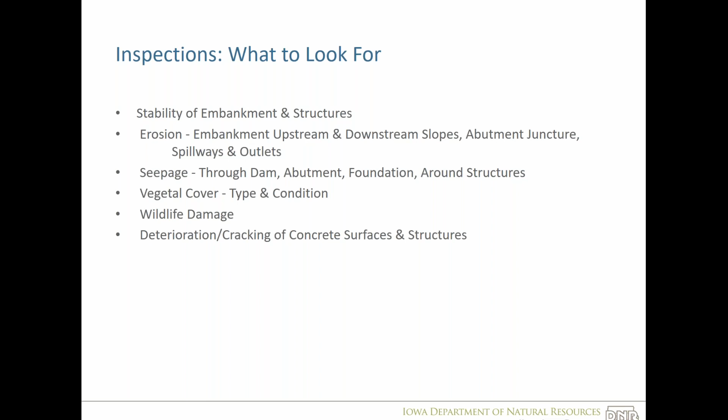How well is our grass cover doing? Do we need to clear it? Do we have any groundhogs or muskrats or beavers issues going on? And we talked about concrete surfaces.

So now we get on to the maintenance side of the O&M.

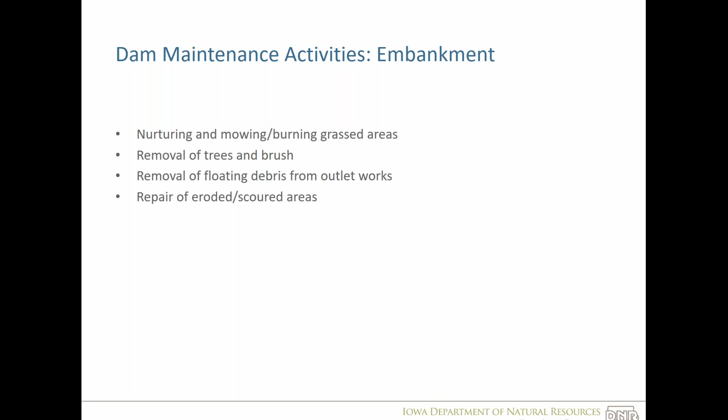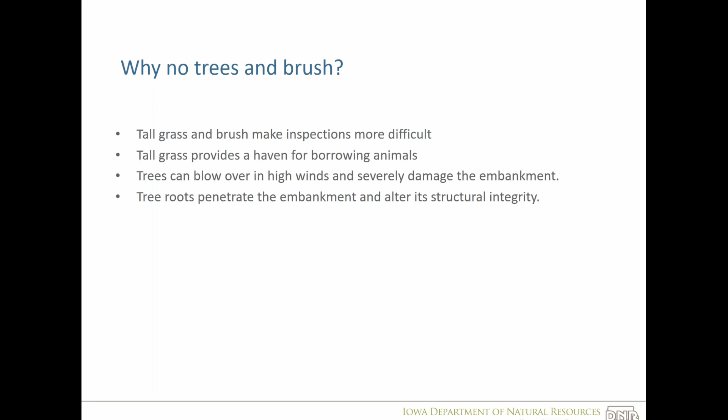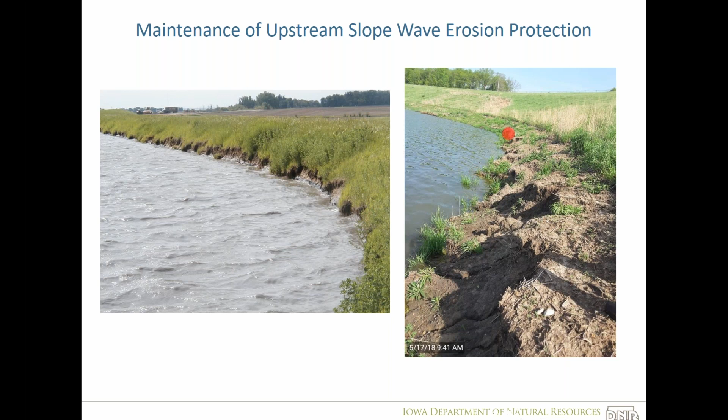Usually our dams either have a bench that they'll design to break up the waves and prevent some of this heavy cutting, or oftentimes we'll have small riprap or large riprap along the upstream shore, because waves can really do long-term damage. Day to day, that wind pushing that water doesn't take long to start cutting away. So a couple examples here of that.

We have a pretty robust groundhog population in Iowa that love to dig holes. You also get muskrats on the upstream side. Isolated, they're not that bad, but you get more and more and it just gets worse. The worst case scenario is if you get a burrow on the downstream side and a burrow on the upstream side, and they start to join - basically now you've got a pipe. Or even if you have a burrow on just one side, you've shortened that piping path that much shorter.

In Iowa primarily, beavers will occasionally build berms upstream of our intakes, and also maybe downstream of our outlet works too, backing water up. But they generally don't damage the dam itself too much. Groundhogs and muskrats, though, like to burrow in.

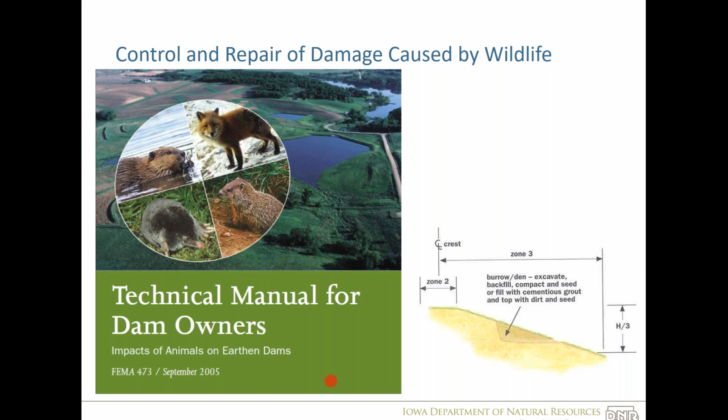So, spillways. Obviously the whole point of having a spillway is to pass the water, and if we have debris blocking those, that's going to impact our capacity, which would lend to higher risk of the dam overtopping.

We want to make sure our gates, if we have them, work - that we can open and close them. Any metal can rust or deteriorate, so you need to budget and plan on sealing, painting, and repairing those. As we have grouts, joints and cracks opening up, we need to reseal those. When we have concrete chutes, those joints - really after 10 years, a lot of that joint sealant gets popped out through ice and things. That's a major maintenance item: resealing the joints of our concrete chutes so they don't get water flowing underneath them.

Concrete itself - concrete quality can vary quite a bit. It's interesting, sometimes we go out to a dam that has 100-year-old concrete and it looks great. Another dam has 10-year-old concrete and it's spalling and in bad shape. It all depends on the original quality and construction methods available when they built it, and that can be costly. So that's one of those things you want to note and start to budget if you have large areas starting to spall, to get that resurfaced.

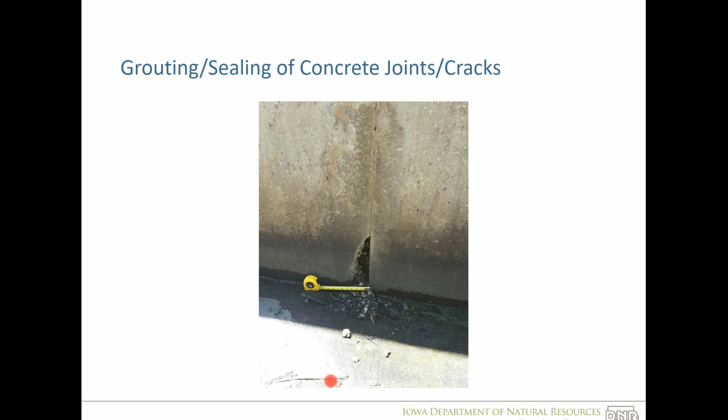Just an example there of some poor concrete that needs to be repaired. That's some of that spalling we talked about.

Any warning signs you have around the dam should be checked and replaced. Look at your instrumentation monitoring systems, maintaining those, and we've talked about upstream slope protection. Even if it is rock, riprap quality can vary quite a bit throughout the state, depending on what was spec'd or what was delivered. Sometimes what was 1 foot diameter rock riprap, after a few years becomes 3-inch stone and starts to wash away. So sometimes you'll need to replace even upstream rock protection.

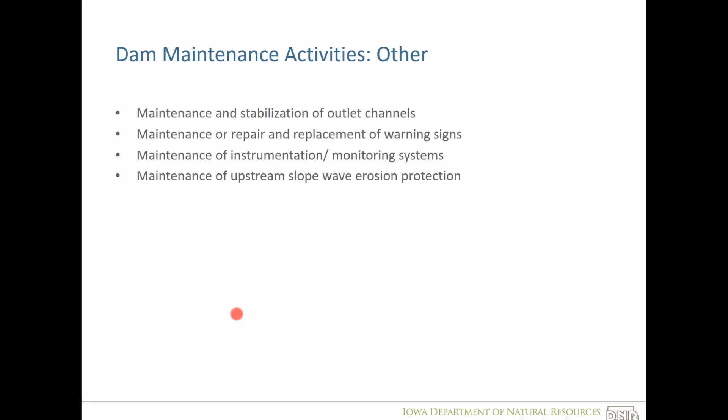I wanted to touch just a little bit on public safety at dams. It's a little bit different - it's not something we have as firm in our rules or requirements, but as a dam owner you're still open up for liability for people getting hurt at your dam.

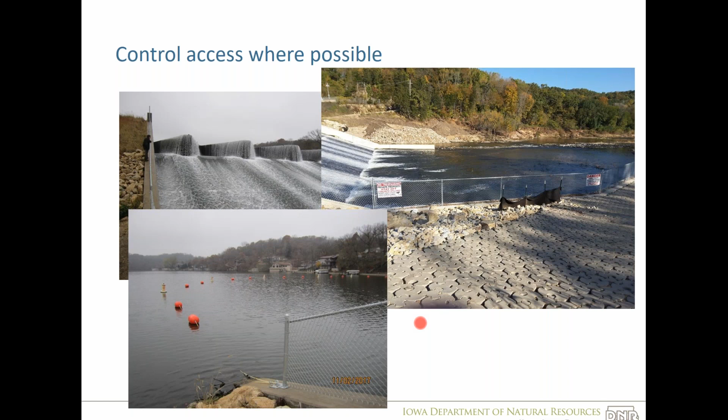The first step is, anytime you can control public access, try to do that - putting up warning signs, adding fencing, those sorts of things. A couple examples here: this is the newly constructed Lake Delhi, but they've got fences up along their walls so someone can't fall in. They've added buoys upstream of the dam to help prevent boats or swimmers from entering that dangerous area. And some signage that says no trespassing, private property, those sorts of things, to try to minimize and protect people from getting into dangerous situations on your structures.

As far as people using the river or stream, I wanted to point out that the DNR does have a sign manual, really set up for low head dams on our rivers, with best practices for how to properly place warning signs for people on the river around those dams. But any dam can provide an attractive nuisance for people to jump off your spillways, ride down your spillways, jump off your structures, or swim near it. So there's a lot of guidelines out there as well on public safety at dams.

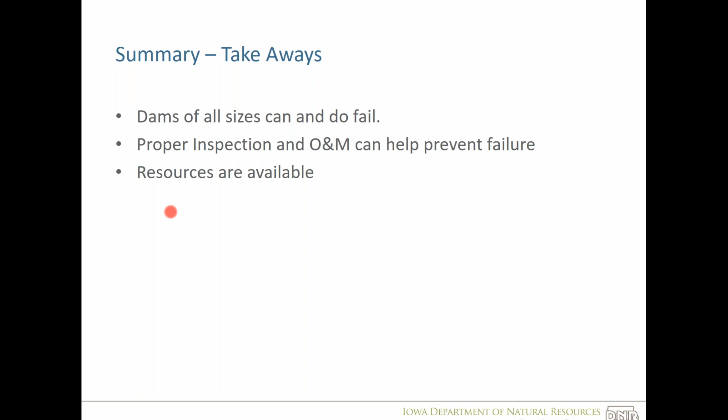So, doing good on time - that's kind of what we were going to talk about for today's webinar. As we talked about, dams fail, and we have incidents every year, so it's important that we do due diligence and keep on top of our O&M to help find any indicators that failure is on the way, and also to prevent failure by keeping our dams well maintained. There's a lot of resources out there - like I said, we just hinted at a few.

There's a few links here that are in the slides, and these are also in our handout. A good place to start is damowner.org - that has a lot of good resources. We link to some of them, but I think there's a lot more, and that web page is by the Association of State Dam Safety Officials, and they're always adding new content. They're working on a series of videos as well - they have a nice Dams 101 video on there, and there's more coming.

As we talked about last time, damfailures.org is a really nice website split into two parts. You could look at case studies of different dam failures that have occurred, and they have a lot of them. They also have lessons learned, so you can go there and ask, why do I need to keep trees off, or why do I need proper design. There's a lot of different specific topics you can read more about to get smart about dam safety.

We don't spend quite as much time on low head dams, a little bit different beast. But we have a nice page on our DNR website about mitigation efforts going on for low head dams around the state. And if you're a dam owner with questions about fish and plants in your ponds, our fisheries biologists have put together a nice page on the Iowa ponds and fishing section of the DNR website. I encourage you to check that out, and you can contact them for advice on how to stock.